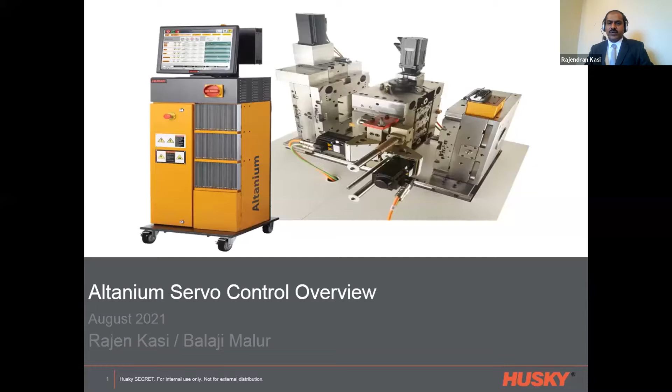Rajen, over to you. Good afternoon, guys. Good afternoon all. Thank you, Hafiz, for the kind introduction. It's a very interesting session today, very important for the industries, very much needed. It's more on Altanium servo controlled systems.

The industry is moving fast enough in terms of mold automation and turnkey solutions, always looking for what kind of speed with precision and quality they're looking for. So today, Husky, we are bringing to you a servo control overview, which is a globally successful solution developed by Husky.

Let me bring you through the detail of the session. Along with me, Balaji Malur is one of my senior technical managers who sits in Singapore. He will be there in case of any doubts, he can clarify for us.

Hello, everyone. Just a few quick updates on Husky. You might know about Husky already, but just a quick update: Husky is a very industry leading hot runner and controller company. We work with mold makers, brand owners, and converters directly. Our vision is to be a highly precise and high quality manufacturing solution provider for hot runners, valve molds, machines, and turnkey solutions.

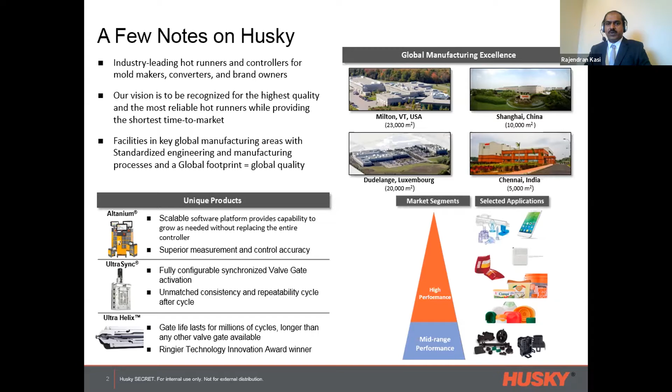At Husky, we have a unique product, Altanium, and UltraSync, which is more on coming to servo control pneumatic systems, and very highly precise industry leading Ultra Helix valve gate systems. In terms of market, we serve most of the high segment market, especially where there is high precision in terms of volume as well as application-wise.

Husky has a well-known global support network on service, owned by Husky globally. We have manufacturing, sales and service, and also a refurbishment center to support customers globally wherever they are nearby. The ultimate aim for Husky is to make sure the customer minimizes downtime to improve their production time, so you will be on top of the industrial supply chain to your customers.

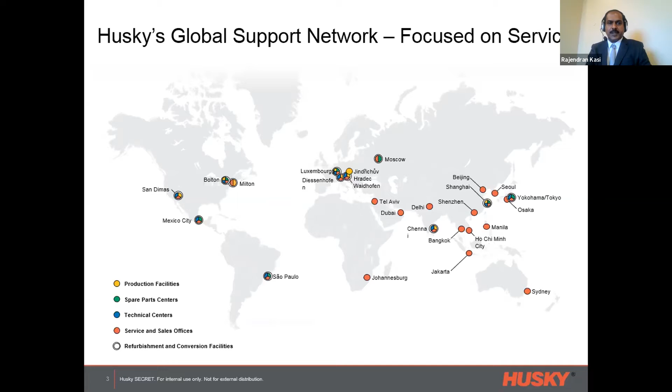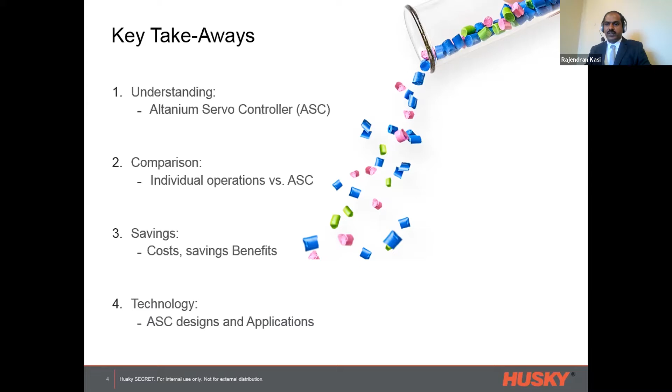Today's takeaway is the interesting session on Altanium Servo Control, which we'll shortly call ASC. We will bring you the basic understanding of what that is, and also compare the solution—why not a simple individual control rather than the ASC. We'll show you how it works with individual as well as multiple standard local solutions. We also have very detailed Altanium servo control designs and what kind of applications you can pick up.

Today, it's a very simple chart you can understand. For example, if you are having a servo controlled mold, you need to have a temperature controller for hot runner, and also a servo controller, whether it may be unscrew, in-mold closing, or core rotation. And you will have one more controller if you are operating the valve gate with a servo.

So instead of three separate interfaces, it can be combined into ASC, which is Altanium Servo Controller. This is a simple way to understand why we need to go for an Altanium servo controller rather than individual controllers. Because if you're having in-mold closing, you will have one interface, and if you have unscrew, you need one more interface. So rather than multiple interfaces, you can connect to this simple ASC.

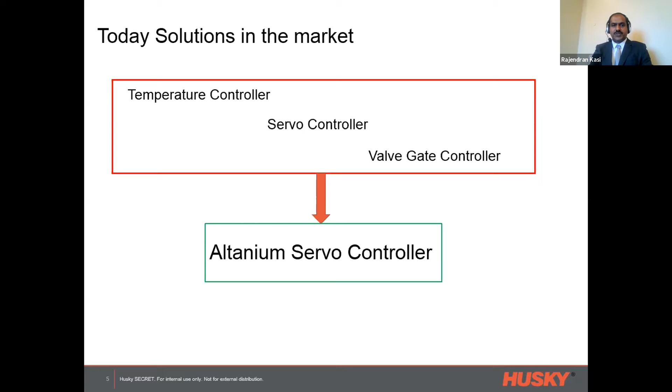Which over the session you will be able to understand. We are also having an open question and answer session at the end, where we can clarify any doubts. So today, the Altanium mold controller.

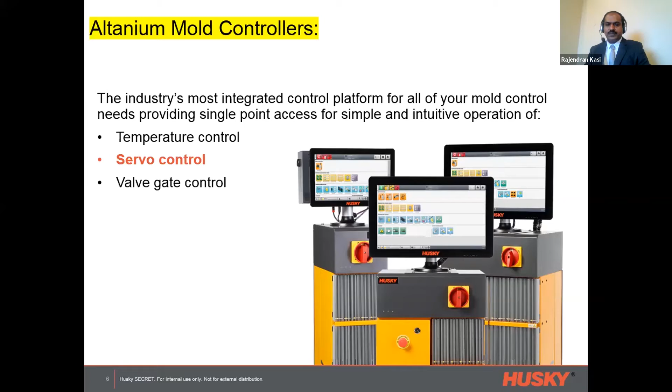Husky, well known, this temperature controller is the most widely used controller platform in Husky, which controls the temperature. And along with that, we are bringing together a servo control and also pneumatic, ultra sync, electrically operated valve control. So what is the use of that?

If you have a single interface - in the left, I'm just bringing the pointer option - so this is a single interface, instead of having multiple interfaces near your injection molding machine. So what are the things you can bring to this interface?

You can bring the temperature controller for hot runner, the valve stem operation controller, the mold servo control where you can connect multiple axes on it, and also the sequential valve gate control.

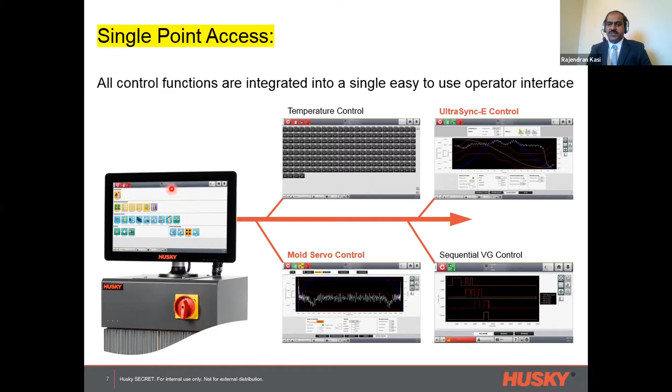If you have some sequential valve gate controller, you can bring it along into one interface, which would be easy to operate. Moreover, it can be linked together so that it would be safe for the mold and your operations over the period. So this is a simple example of how it looks.

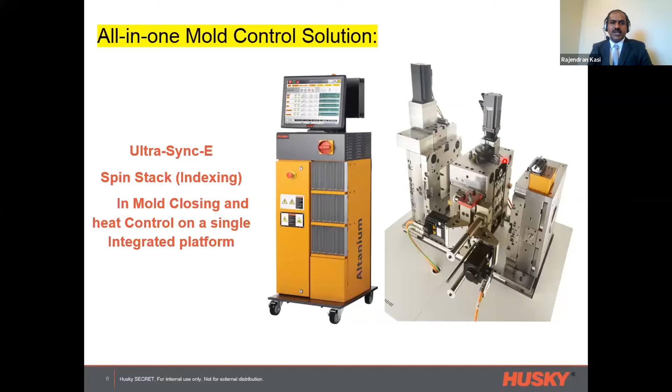In this mold, you are having a spin stack, which requires a servo motor to connect it, and you are having an in-mold closing, and you are having Altanium controlled valve gate systems. So this is all integrated into this single interface, which would be easy to operate.

So what is the value for you? Typically, if you have a typical hydraulic system, it's more complex because you need to have a hydraulic system, and then you need one interface to operate this hydraulic system. Moreover, you're not able to control the speed or the finishing position.

And it always has contamination problems, which reduce the performance of the system after you've invested in a very nice mold with a very effective product design and mold design, an ultimate mold. At the end of the day, if a typical hydraulic system has contaminations, it reduces operations, and whatever you plan, it ends up being less efficient.

So what is the solution? The solution is how we optimize our mold design - better cooling, better steel, better tolerance, better design. We also need to think about how we control them in day-to-day operation in each and every cycle. That's where this Altanium servo controller is required for your mold and injection molding operations.

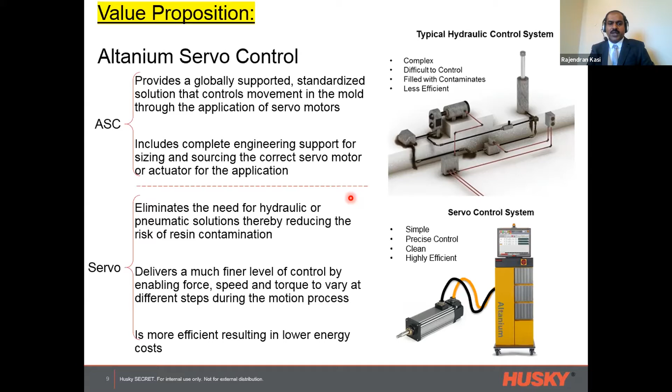You can't do it in hydraulic, you can't do it in pneumatic - it has to go with electrical servo control. And in the servo control, what is special for Husky? Whatever control you put in, it can be integrated into one system, which is ASC. That's where we bring it to a complete optimized system.

So what are the areas you can look for? You now understand what is the need for the Altanium servo controller, how we incorporate it, and the areas where you can use it.

Of course, it's more important for medical industries, because you need cycle to cycle, part to part, very precise, very accurate, CPK pass - everything that's more important in medical industries - and also for very high cavity non-medical industries. Let's say you're running a 48 cavity or 96 cavity unscrew closure. If you build a beautiful mold with a beautiful hot runner and everything, but end of the day your unscrew mechanism is run by hydraulic or some local servo control system, and if that damages your cores or jams your system, the total investment is going to go stale. So even for non-medical applications, it's very important to have this kind of system to protect your investment and achieve complete optimization of your product.

And what are the applications you can use it for? You can go for stripper plates or slides, coining plates, rotary cores and core pulls, turntables, and also spin stacks, and more importantly, in-mold closing for non-medical industries.

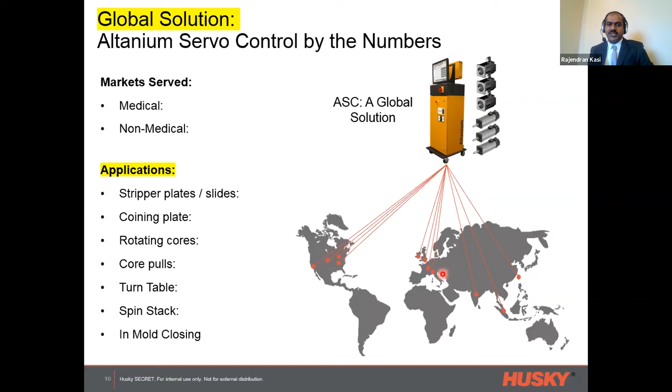We have already been working on this for quite a long period, and we have installations around the globe running very successfully. Those installed customers are actually very interested to move further with this kind of solution rather than hydraulic and pneumatic, more integrated into Husky.

So how does it work - how do we do this total solutioning of the Altanium servo controller? We do the application engineering, because this is more about precise control. So we need to work directly with the mold maker to find out the right size of motor and actuators. We also need to find out from the molder what kind of injection molding machine you're going to utilize, and what signals can be taken from the machine to the injection molding process.

Based on that, we integrate it into our controller. It will be assembled in Milton, Vermont, completely specification-filled inside the system, and the controller is operated there, then sent to the mold maker for assembly.

And the very important thing for you as a customer is global support. Asia has become more of a molding hub, mold making hub for global customers, especially high cavity customers. This kind of global support from a company is very important today. If you have some locally available servo system integrated together, and you've gone somewhere like South Africa or Brazil or European countries, without global support it would be a nightmare for you, because you can't get support at any time.

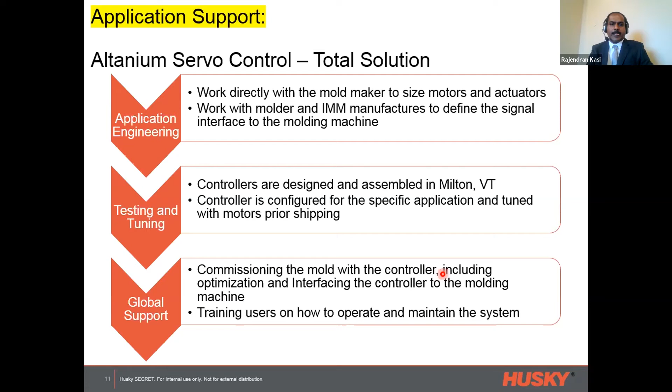So how do the application engineers work? All the quotings are based on the dedicated application, and we take details out - let's say you are developing a 96 cavity unscrew system - we will ask you what kind of design of caps, what kind of force you are looking for, what kind of design you're going to use, and what is the cycle time or resin detail.

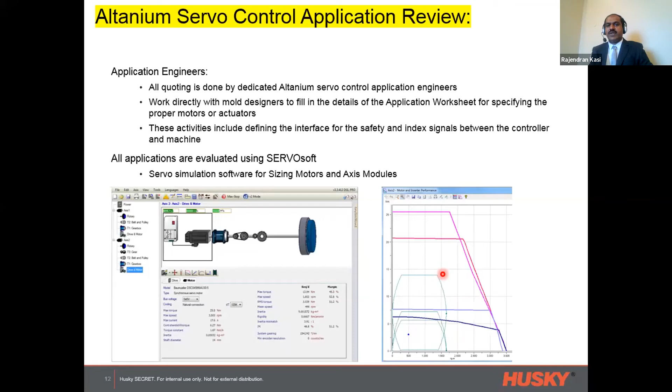Based on that, we are able to incorporate our SERVOsoft, a dedicated servo simulation software. Prior to delivery, we precisely size the motor and the axis modules, and do the complete simulation inside our factory. Then we integrate everything and send it to you for field assembly with our engineer.

So how can you take it? You can take it as a standalone - it's not mandatory to go only with hot runner, you don't need to buy this one. Even as a standalone you can take it. If you want a more precise servo control system along with global Husky support, you can take it as an integrated solution. You can go standalone or integrated.

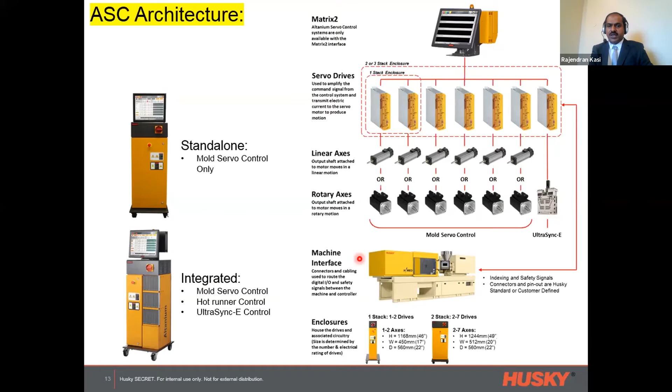On the application side, you have servo drives, and you can pick whether it's a linear axis or rotary axis. Based on the injection molding machine, we can have the injection molding IO option integrated together with the machine controller, so that the controller and machine will talk to each other and make sure not to produce any bad parts or difficulties for you.

This is some examples of how it looks. This is like up to a 2-axis servo Altanium controller, and here you could see a 6-axis servo controller along with an UltraSync-E drive, E-controlled valve gate system.

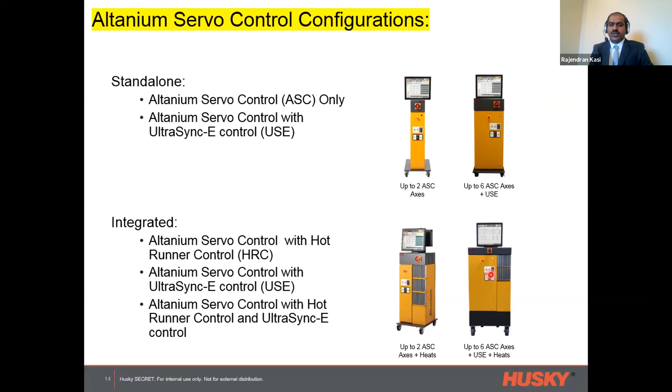Here you have a temperature controller integrated with the axis. And this is combined with the hot runner controller and Altanium servo control axis controller, as well as the valve control UltraSync-E.

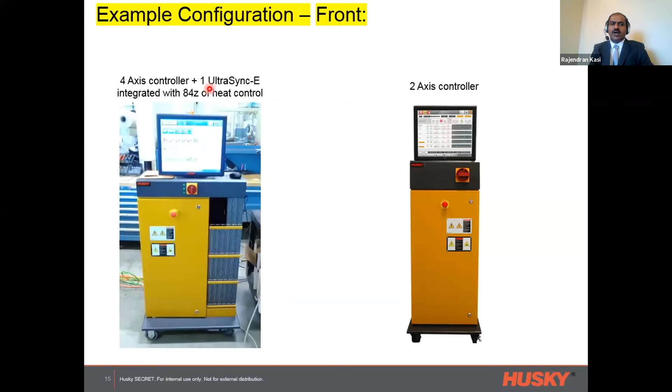This is another example, like we do have an 84-zone temperature controller along with 4 axis and one UltraSync-E integrated for valve gate operations.

This is how it looks internally - completely interchangeable parts, very neat and tiny. Because today, if you see the market, what's available in servo controllers is more bulky, and it's not easy to keep in your machine.

So this is more for your injection molding surface usage. It would really support your injection area, making it more neat and clean, and it would take much less energy for people to operate in one interface rather than multiple interfaces occupied all over the injection molding machine.

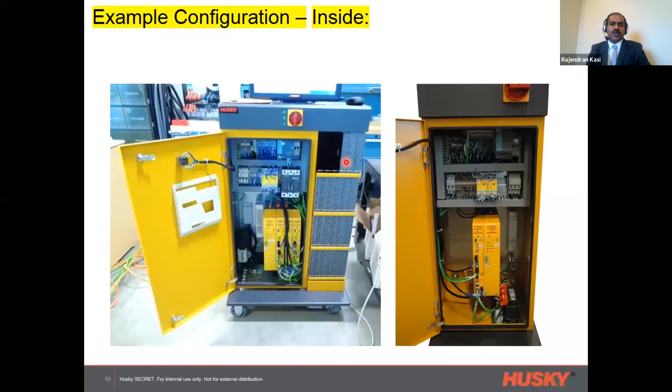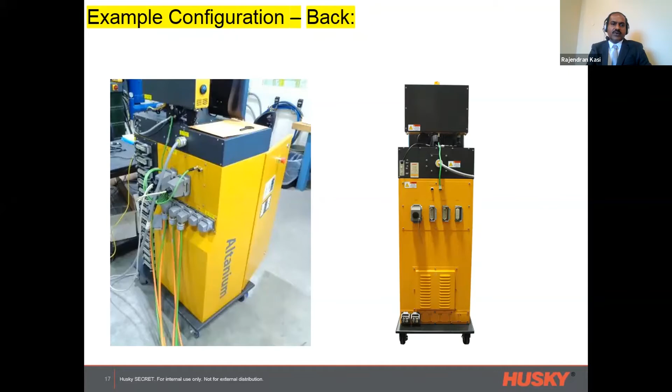This is how it looks like. You can have a complete Altanium controller with heat temperature controller, and this is the AAC signal, and here's how it goes to the valve gate controller.

Along with this AAC, as I told you, the IO option is integrated along with the mold and machine, which can be very useful especially for automated production and high cavity unmanned production. It can have user-definable outputs.

You can set it so that, let's say something goes wrong with the machine temperature, it will automatically send the signal from the machine to the controller. The controller will start to stop activities like moving the valve stem or moving the core, or bring down the temperature to a certain set point, so that the whole operation goes in parallel.

Otherwise, what will happen is that if something goes wrong on the machine with a standalone product, it will keep running separately and continue pumping heat, which can sometimes degrade the plastic or overburn the material, or the valve stem movement becomes difficult for operations. That can be avoided by utilizing this digital IO signal. It's very useful for those running complete productions.

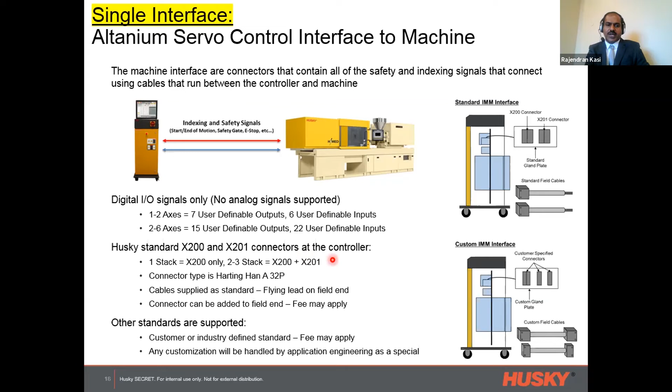In terms of servo control, motor and actuator, we work with two types of motors from two different global suppliers, like Baumuller. You may have heard they are very good in rotary axis motors, which we use for UltraSync-E control valve gate - very nice speed operation, very precise, very silent. And for linear actuation, we use Exlar actuators.

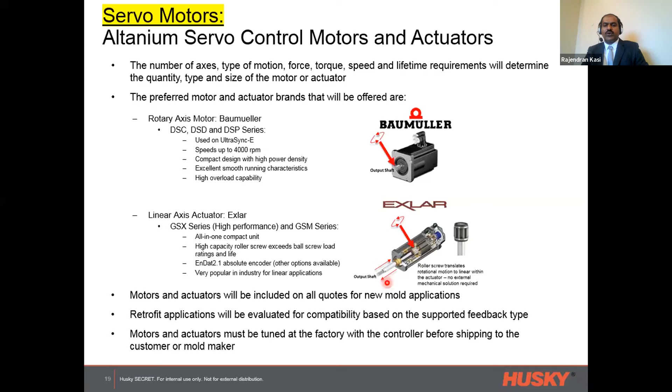All of this we include along with our offer, because we do the ServoSoft - we utilize the design and then compile it and give it to you as the turnkey solution. We also have closed loop feedback using this servo system, using the absolute encoder as well as the resolver. So we have digital feedback as well as analog feedback for position and location.

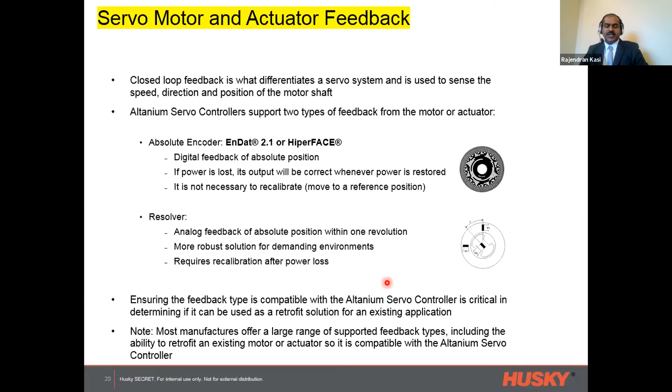So that's how we make sure that the new servo controller works very fine. Moreover, we are trying to use it for new mold development. And even if you have some existing application which would be critical for your operation, we are okay to work with your product design team to determine the application for the retrofit of the current systems.

And this is how it looks, the servo motor. You will have complete feedback connectors, and then you have excellent brake and the feedback wires, and also a stator winding and output shaft where you can connect your motors.

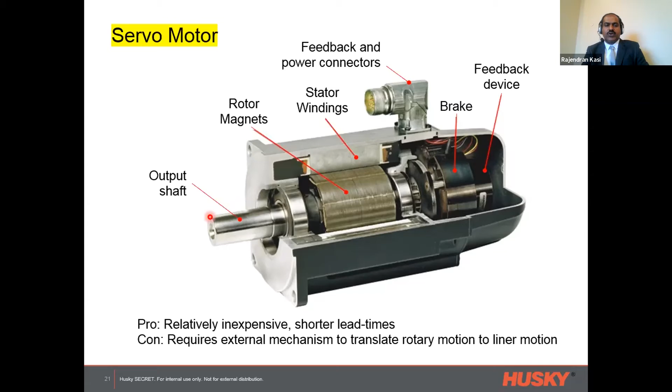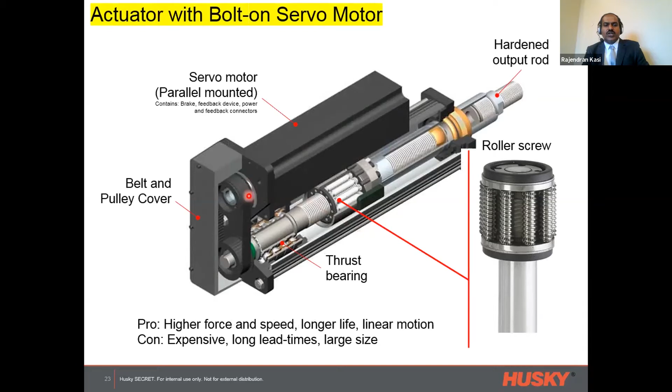This is the inner structure of the servo actuator with the integrated motor, where you can have linear operations. And you can have one more adapter for belt and conveyor pulley. So all these, based on your design, we can design and supply along with the systems.

So how are we offering in terms of the servo controller system? Basically, we can support you as a turnkey solution when you go for a new mold design. So we can be involved from the conversion to electric actuation, basically for a medical mold, a crate molder, or a precision molder, or even we can start to work with the mold maker as an alternative to one-off engineering solutions.

When you are developing the mold design, we can integrate our servo designed systems, which would be more precise. The mold will add up value together in order to have a committed cycle time and committed quality for a long time.

And also, if you are a molder today struggling with a complete hydraulic system, and you are having a lot of failures, or struggling with today's supplies, basically hydraulic system failure, we would love to take that opportunity to analyze for electrical actuation systems, and then we can design the application and integrate it for your molds.

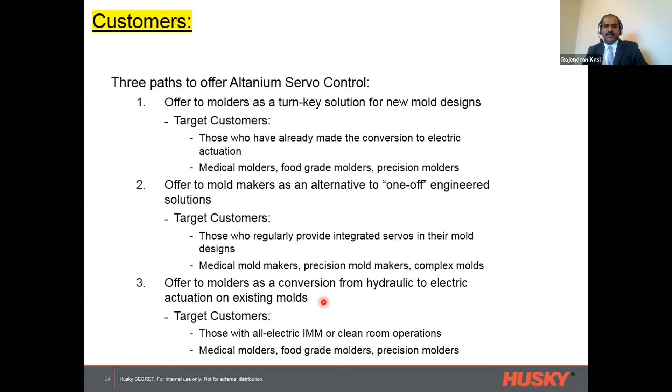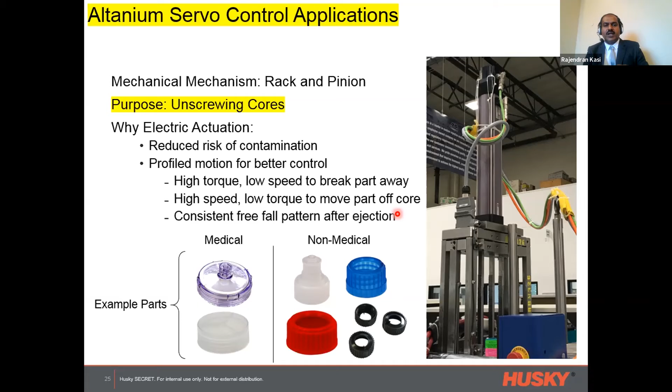So these are some of the examples, like a rack and pinion, how it works with the servo systems. It's a kind of profile motion for better control, so that you can have high torque with low speed to break the part away, and high speed low torque to move the part off from the core. This pattern can be very consistent, so that each and every cycle will have the same kind of force for the product to come out from the machine.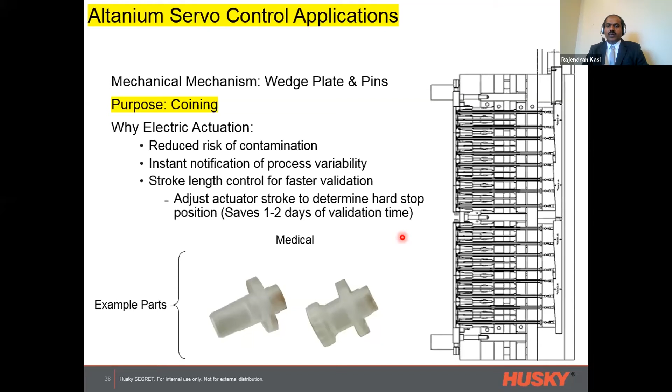And the stroke length allows for faster validation. So based on the input, you can adjust the stroke length. This is more for a slider and core pull.

You can have a very preset cycle and a study of where you want to open, at which speed, at which position, to move out the part. So this is to avoid risk of contamination.

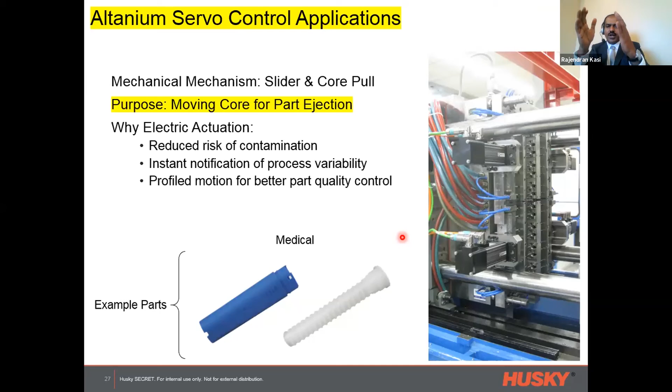So you can set the motion, especially maybe initially you move slower, and in between you move faster, and finally you can go, so that your product fall-down would be very profiled.

And this is how the IO screen looks. It would be more visible for your process engineer to see what kind of safety assessment is in the system. It will be very clean, a green signal. If everything in the safety mechanism is in line, it will show that. If there is a malfunction, you will have an alarm, and then you will have a complete data history.

So it would provide you what is connected, what is this, with fields for adding user defined labels. You can label it yourself, like this is for the core plate, this is for the valve gate, and for each IO option, you can find where you want to set it up, whether this portion you want to make forced low or forced high.

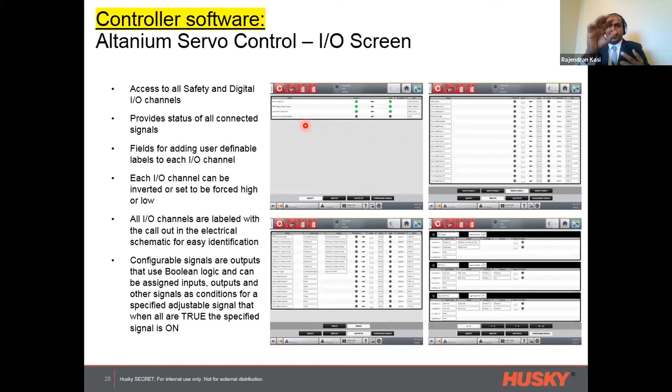And moreover, along with the one industries interface, you can see temperature, you see the IO option, and also you see the Altanium servo controller, as well as your core pull moving signal, everything. It would be more beneficial for people to operate, and easier as well.

So this is what I explained, the motion curve. You can have position and speed, whether you want to accelerate, and a force limit for where you want to stop.

So for example, here the blue color is speed. Initially, for the first few seconds, you want a slow start, then in the medium you want to utilize the ideal cycle so you have more speed, and at the end you want to slow down. This is completely an on-screen, software-based solution.

Based on your actual process, speed and force everything can be set within the process itself. Normally we don't pre-define this in the factory. So based on your actual result, if we are using the core for a stripper, rather than mechanical or hydraulic adjustment, we can do it by servo control.

So at the start, for like 2-3 mm, we need this much speed, and in between we want this much speed, then we want to slow down so the part can fall within the particular position. Or in terms of rotation and ejection, for example, initially you want a slow rotation.

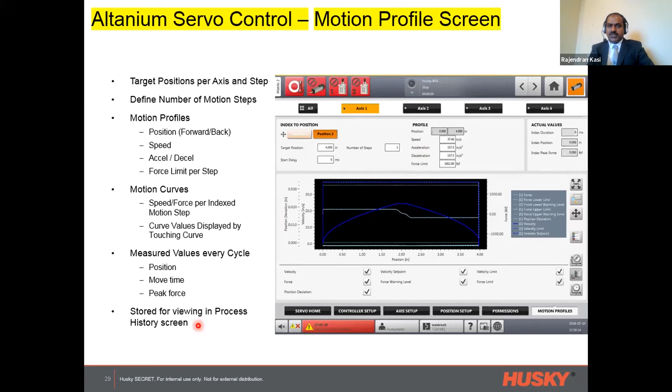So that's the overall view. Moreover, for a medical molder this is very important - this historic pattern can actually be stored in the system, and you can print it out for your recording purposes.

So this is how it works inside, the limit up to the 4 index positions. We have 4 index positions, so the motion can be a sequence of 4 index points, and you will also have linear motion with steps. This is the basic example we're giving - you split into 4, and based on the 4 you speed it up, so it becomes a more structured way of application for your products.

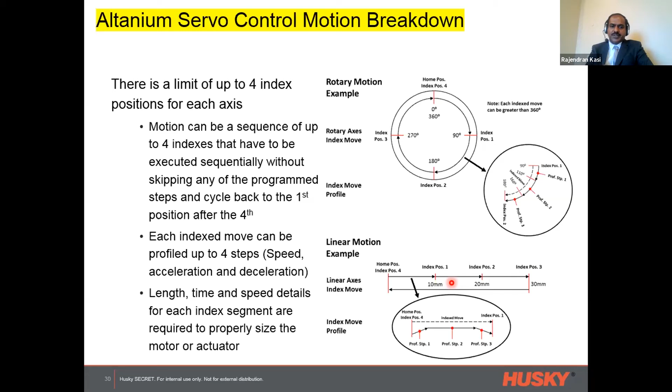This is a typical system you could see from the market - you'll have a bulky control system with one controller, and you'll have all this button type setup, and of course it has to be integrated together.

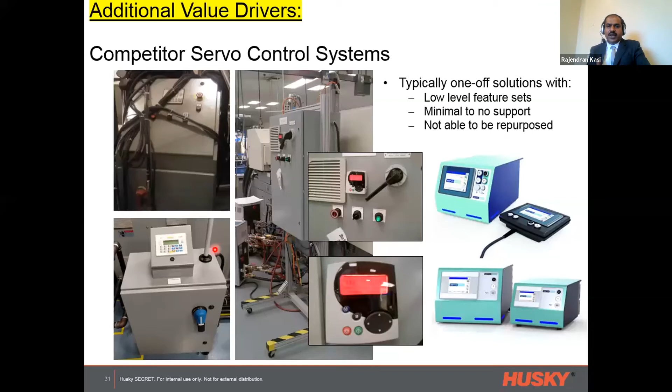The critical part for you is, if today you have one core rotation, you need one system like this. Then tomorrow you want mold closing and you need one more, and the day after you have an electric operated valve gate and need to buy a separate valve gate controller, and then you need temperature control too. This is where the Husky Altanium servo controller comes along as a single source for you.

So it's for ease and speed of integration, where you get a much faster installation and commissioning. This is more about setting it up and adjusting based on that, because it's more on motion control.

Also, the actuator and drivers are commissioned in the factory, so most of your time is saved, because we use the servo software to optimize it, and we provide startup support.

So you can modify from time to time the performance based on the product quality, as well as the performance of the mold. Because when we drill down, we know what kind of performance is inside the mold, so based on that, we can fine tune this servo controller for better operations.

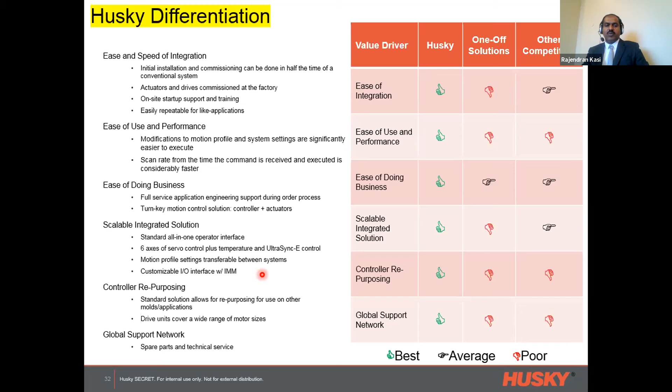And of course, Husky is supplying a global solution in terms of application. We take care of the complete turnkey motion controller for you. It can go up to 6 axes of servo control plus servo in terms of valve UltraSync, plus temperature controller, and you can integrate along with the IO option, integrated together with the controller and machine. Moreover, you are buying a global support network solution, which would be good for you to invest, and also have global network support where your end customer or you as the user would be benefited by 24/7 support.

So this is how finally we work. We provide you a dedicated application engineer when you have a mold design. The application engineer will start to work with your designers to optimize the controller, to specify the correct actuator, and that is more on the

motion control technology which we need to do, which is a little bit hard for the designer to select the right one. So we are removing that responsibility from the mold maker designer to us, to specify the right actuator and motor, so that you can concentrate more on the design part and how to eject and how you design the mold manufacturing.

And we utilize our global expertise to incorporate along with your mold to specify the right actuator and motors. And with the design defined, we can define the signal interface to the machines, so that rather than your process engineer optimizing it, we just talk to your injection molding machine suppliers, take the signal, and then we modify our controller along with that.

And we can do the pre-tune actuator so that it can be shipped together and then integrated for a ready-to-install run. This would be, for every order, every controller, optimized. And of course, we are trying to maximize your utilized applications.

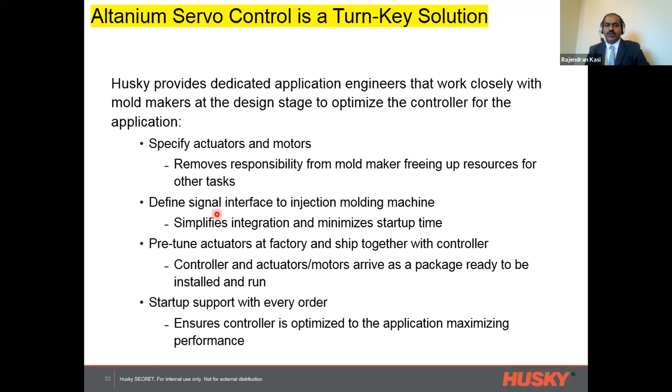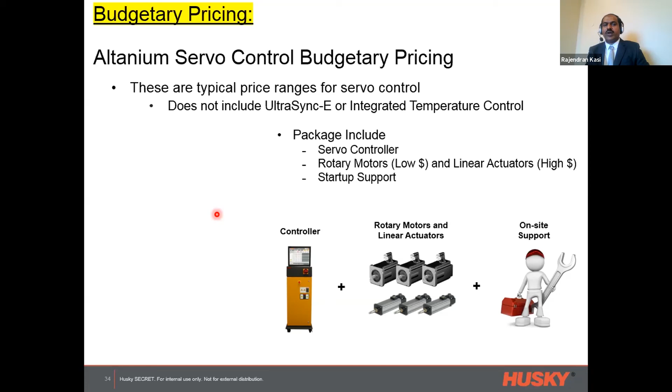So if you see the budget, if you combine everything together in terms of the controller, the one-stop rotary motor and linear actuator, and the global support, and the ROI, where you invest something in a big way in the mold, and also part of it you invest on this servo controller with Husky support and a global solution, I think it's very near for an ROI, and it would be very good for your ROI, which we can, along with my managers, work with you or your team to find out what kind of ROI you can bring to you or your customers. That's the end of the presentation.

So we are glad to hear from you guys on this advanced mold automation solution. We thank you for your patience for the last 45 minutes to hear this important technical detail, and we are open to your questions and answers so we can have detailed discussions. I will hand over to you.

Thank you. Thank you very much. Thank you very much, Mr. Rajan, and really appreciate your time and insight.